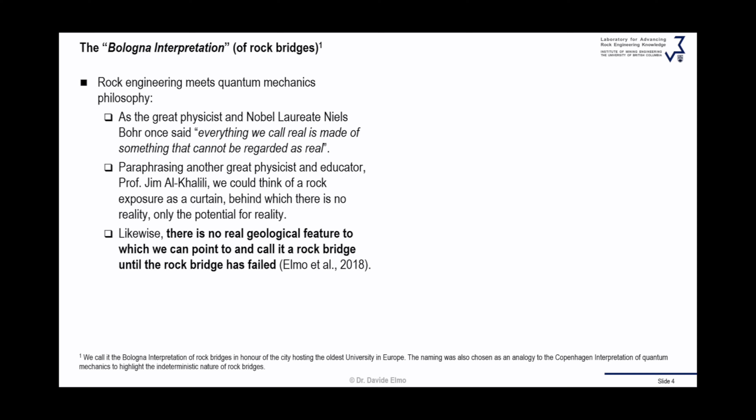This then links to where quantum mechanics philosophy and rock bridge study come together. This is the definition that I gave a few years ago in a paper: there is no real geological feature to which you can point and call a rock bridge until the rock bridge has failed. Again, you don't touch the rock bridge.

Look at this photo here. These are two photos from the Berry Head Arch in Canada, one taken in 2002, one taken in 2020. You can see now, if you look at the 2020 photo, which blocks have failed. What are the failure surfaces? But you could not determine those failure surfaces in 2002. They were hidden behind other blocks. So your rock bridges were there, but you couldn't see them.

So the definition we can give now is this: one cannot actually know where a rock bridge is until you measure it. And to measure it, you need the rock mass to fail. So you can see that we hit a paradox here. To measure the rock bridge, the rock mass needs to fail, which is something we don't want to do for design purposes. So how do you solve this big problem?

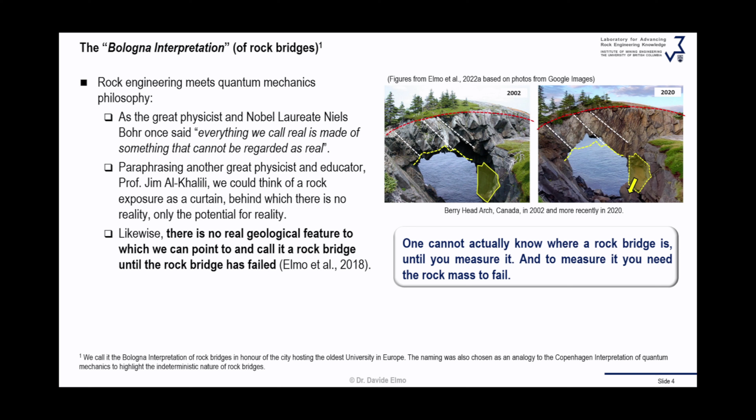We need a new paradigm for rock bridge analysis then. We need to change the way we think about rock bridges.

Prior to failure, it's not a matter of describing rock bridges as physical, deterministic entities. You cannot measure them as simply the connection between intermittent joints. There are only potential rock bridges, which exist everywhere at once.

I know it sounds difficult to accept, but if you look at this rock mass, the rock bridges are everywhere. You can't simply say the rock bridge is the connection between two of these joints. What is the loading direction? What is the strength of the joints? That also plays a part. We shouldn't see rock bridges simply as a geometrical problem.

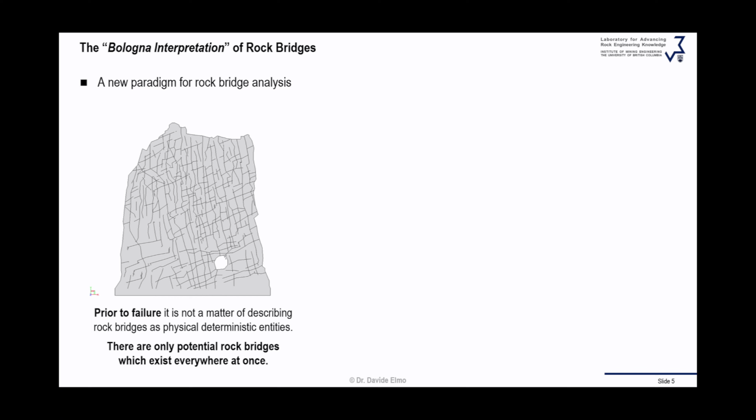If I run the simulation, I see where failure occurs—that's the rock bridges. But what you can see here is that it's a damage process, not as simple as one single crack connecting two joints. So only by looking at the rock mass as it fails can we summon the position of a rock bridge into existence, and therefore measure the rock bridge potential of the rock mass.

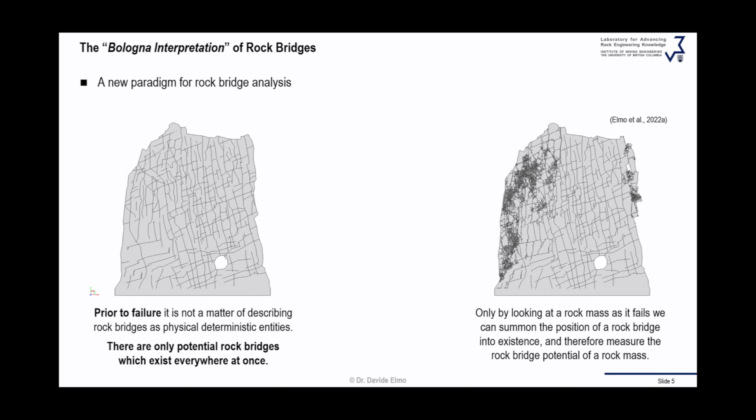It's a question of, as we'll see throughout the presentation, comparing before and after. You have to do discrete element simulations with fracturing. Continuum analysis will not give you the right solution in this case.

If you look at field evidence of this type of operation—this is work done by Shang et al. in 2017—they had a block, and managed to split it open. The block was partially formed by discontinuity. Now you can see what is the discontinuity plane and what is the rock bridge. But again, you have to break the block to see the rock bridge. You can't really measure it before the block has actually failed.

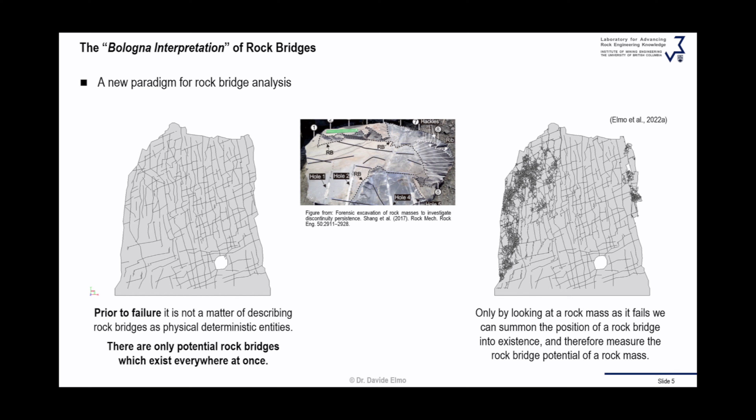And we have plenty of examples in nature. This is an overhanging slope in Israel. If you look at the picture on the left, it looks almost like a dangling tooth—this block that makes you ask yourself, how is it possible that it's still standing up? It stands up because of rock bridges.

You know they're there, but where they are, you don't know. And if you don't know where they are, how do you measure them? Because you can't see them, you can't really touch them—they're there at once, everywhere in the rock mass.

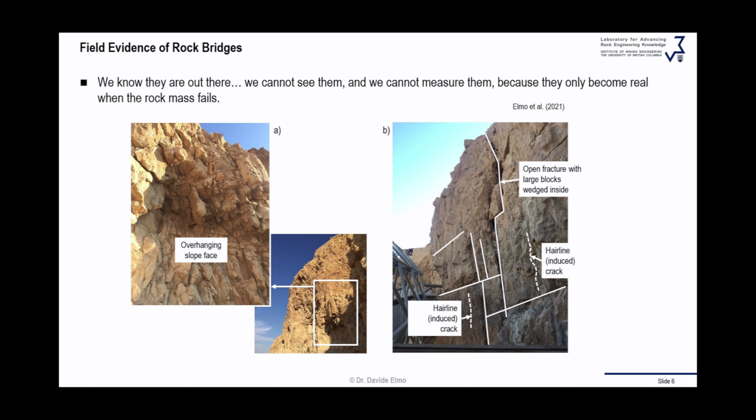This is another very good example from Italy—a tunnel in the Italian Alps. You can see from the photos on the left there was this kind of block attached to one of the side tunnels. This block had been standing for many, many years. One day we went back there to look at the tunnel, and the block was on the floor. So what happened to this block? Clearly, whatever rock bridge was there has failed.

This has a very clear implication, because we can say the block was stable before, but you cannot say what was the factor of safety of the block. It was definitely stable, then it became unstable and it failed. So you can't simply back-analyze beforehand what the rock bridge percentage was. We can see now, looking at the photo, what potentially was the portion of intact rock holding the block in place—but you can't really see it until the block has failed.

Again, you can see this paradox: you don't see them, you cannot measure them, because they only become real when the rock mass fails.

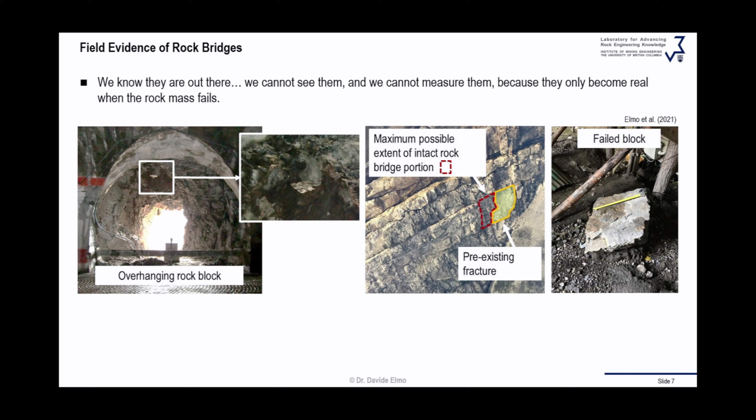So there are rock bridges. But again, rock bridges could be a portion of intact rock where the joints are not fully continuous, or it could actually be some kind of cement—something that has cemented the jointed surfaces together. That's something we don't typically take into account in our analysis. Yes, we want to be conservative, but how else do you explain this structure standing?

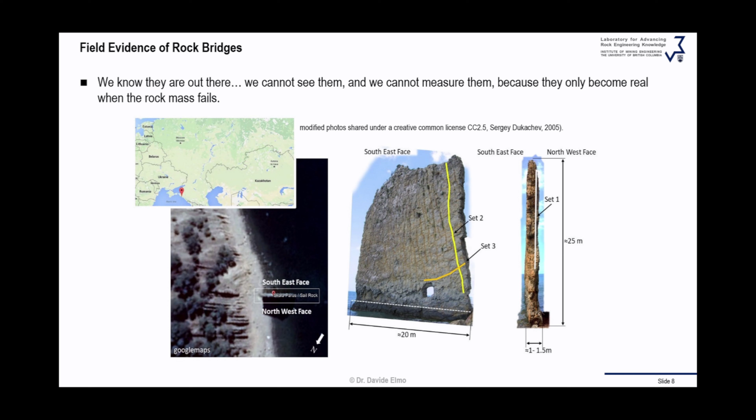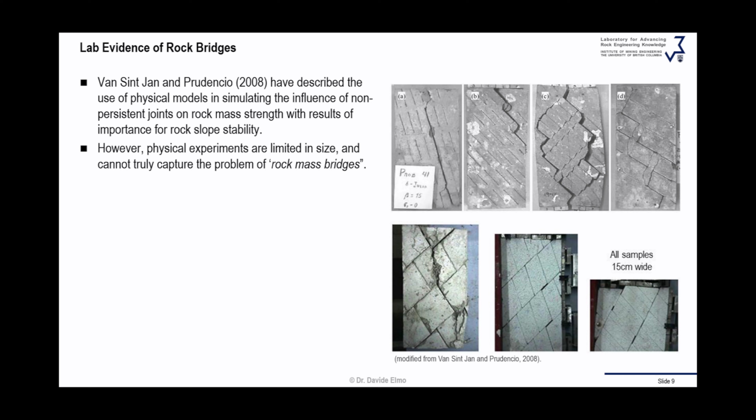Looking at the bottom row of the simulation, the one in the middle has fully continuous joints and failure occurs simply by sliding into the joints. The one next to it on the left also has fully continuous joints, but failure occurs through breakage of the intact rock. So the assumption that a rock bridge is the distance between intermittent joints is not correct. You can have rock bridge failure in a rock mass with fully connected joints. It's a question of the relationship between the connectivity of the network and the loading direction.

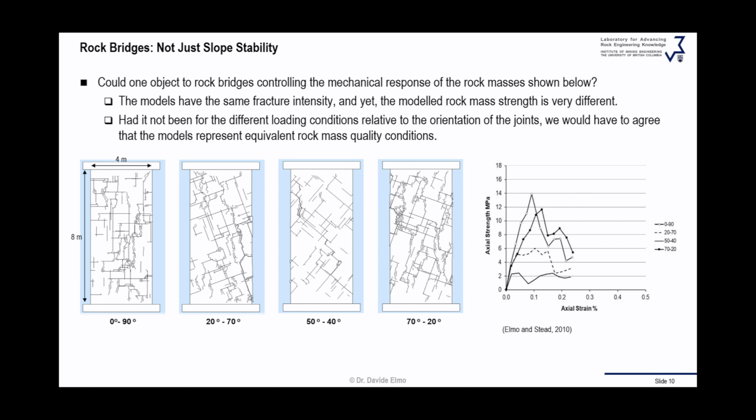So how do you define rock bridge strength when it's dependent on more than just the geometry of the fracture network? We have to adopt a system that looks at the connectivity before and after. The relationship between the two is basically what controls the failure of the rock bridges.

Now we have to deal with the difficult part, because in the literature, in the books, most analysis is done by looking at rock bridge percentage. I also used this concept for many years until I started changing direction and seeing the problem with it. The problem with rock bridge percentage is that it treats rock bridges as measurable deterministic entities. They are not - we've seen that. You don't see them, you don't touch them.

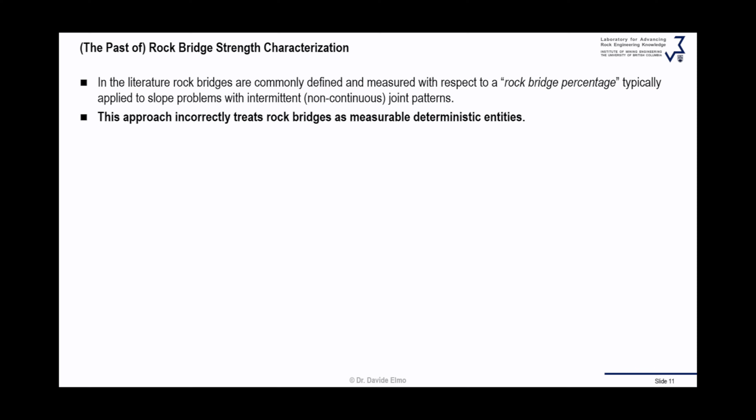This goes back to the definition of rock bridge. Go back to Karl Terzaghi, the father of soil mechanics. In 1962 he published a paper with the first evidence of this concept of rock bridges. Terzaghi called them 'gap,' not rock bridges. This gave rise to the idea of a percentage of rock bridge as the ratio between the total area of fractures and the portion of that surface which is actually intact rock.

But Terzaghi made a very good comment already in 1962. He said the relationship expressed by this equation, which defines the continuity of the fracture, is merely of theoretical interest because it's impracticable to determine the value of Ag. So Terzaghi was saying you cannot measure rock bridges. You can't use percentage measurement - yes you can define them using this equation, but it's merely a theoretical exercise because the issue is where they are and where you see them, in relation to the surface of a fracture. I call these in-plane rock bridges.

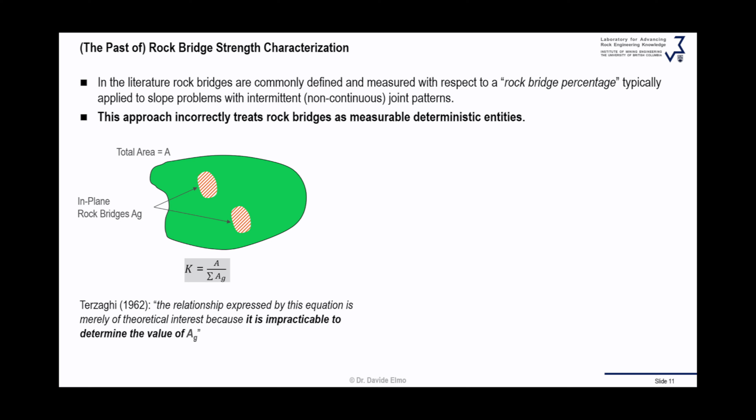A few years later, Jennings developed a different concept of rock bridges, looking at intermittent joints in the case of slopes. Now we went from a three-dimensional to a two-dimensional aspect. You have a block that could be defined if the portions of intact rock between the joints fail. This gives rise to the concept of continuity given by this equation, K - the ratio between the portion of the joints and the sum of the joints plus the portion of intact rock between the joints. Jennings developed equations to account for this.

He said you could substitute the joints and intact rock with a material with equivalent properties. Here we can go off on a tangent - are we dealing with a material with equivalent properties, or an equivalent discontinuity? Because Jennings actually called it equivalent discontinuity. It's different, simulating the problem as a material with cohesion and friction, versus cohesion and friction of an equivalent joint.

More importantly, the books always reference these two equations for equivalent cohesion and equivalent friction angle in relation to the continuity. One minus continuity is your rock bridge, and becomes a rock bridge percentage. But if you look at the original 1970 paper, it's actually a different equation. So we have to be careful which equation we use and how. Because if I use the one usually reported in every book, even the guidelines for large open pit design, you actually give more friction resistance to the problem - it's actually less conservative compared to what Jennings was saying in 1970.

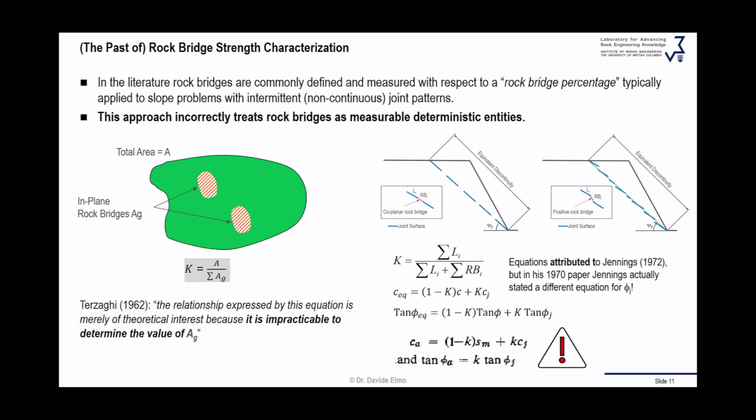But there's more limitation than that, and we're going to see now a problem. First of all, the concept of intermittent joints for coplanar joints. Joints are not always like that. Networks are more complicated than that.

It assumes that the rock bridge strength is spatially independent, meaning it doesn't matter where the rock bridge is placed, you're going to get exactly the same behavior as long as you have the same percentage. Put the rock bridge at the toe, put the rock bridge on the crest, it doesn't matter according to Jennings' equations. It's scale independent. We're going to see now a problem.

If I have a rock bridge percentage of 5%, it doesn't matter if it's given by 5 small rock bridges or one big rock bridge. This is not correct because intact rock strength is scale dependent. And more importantly, it assumes the rock bridges are measurable, as if rock bridge is just a geometrical entity.

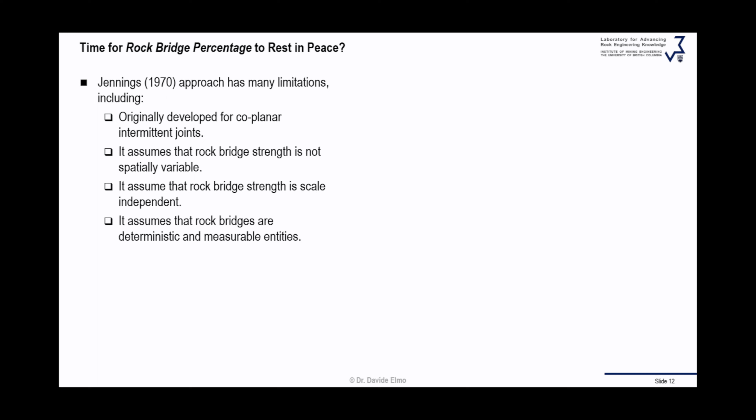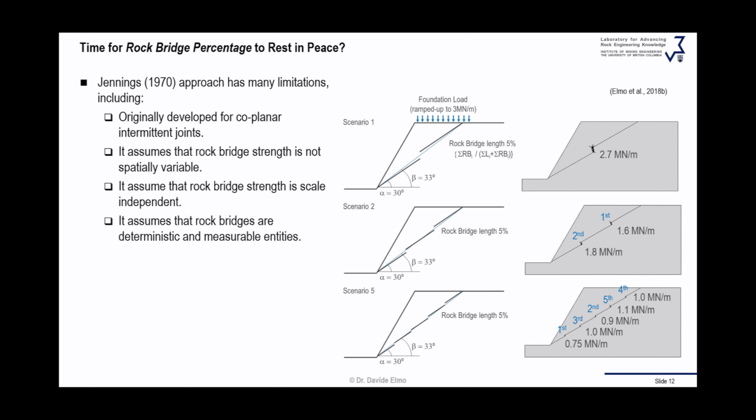If I have 5, the force I have to apply is much smaller, barely 1 meganewton per meter. So now you can see that it's the same problem from a percentage point of view, but the load that can actually be taken by the slope is very different. So this tells you that you cannot rely on rock bridge percentage.

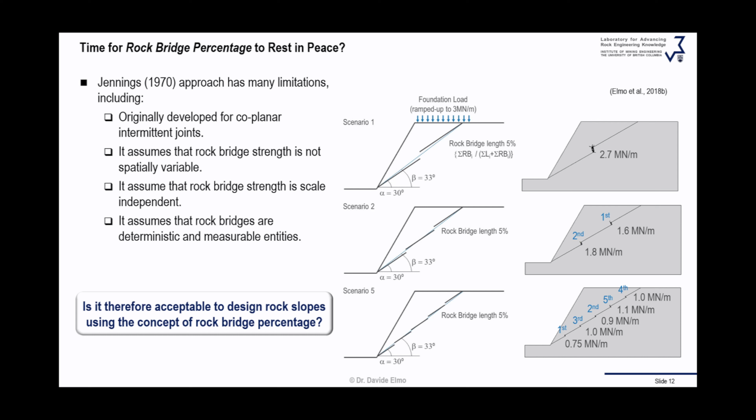And here is the difficult question for everyone now: is it therefore acceptable to design rock slopes using the concept of rock bridge percentage? If you ask me, I would say no. Others may say yes. But remember, there are some fundamental problems with Jennings' equations, and we need to accept that. So we're proposing something different, and we're going to see it's not something easier. But seeing the clear message doesn't mean that because it's difficult we shouldn't use it.

Our approach is different. We take a step back and look at the problem more holistically. What are the parameters that really control damage? We're not talking about rock bridge percentage anymore—we talk about damage and potential for failure. You're going to have the intact rock strength, the loading condition (direction and magnitude), the rock mass connectivity—we'll see the definition of it—and rock mass interlocking, which are very different.

You can have a fully connected rock mass, but the blocks don't move depending on the loading direction. If the blocks don't move, the stress will have to go through the intact rock, and that's what can actually break. So we need to look at how the rock mass potential is transformed from a potentially kinematically controlled problem to maybe a stress-controlled problem. So we try to look at the mechanism, not just the strength itself.

But to determine the rock mass potential, or rock bridge potential as we call it, you need to look at these parameters, and they're not easy to measure. Some of them, like connectivity and interlocking, basically fall under the field of probability. You don't have one connectivity, you have a potential connectivity, because, as I say, you don't know what's behind the rock face.

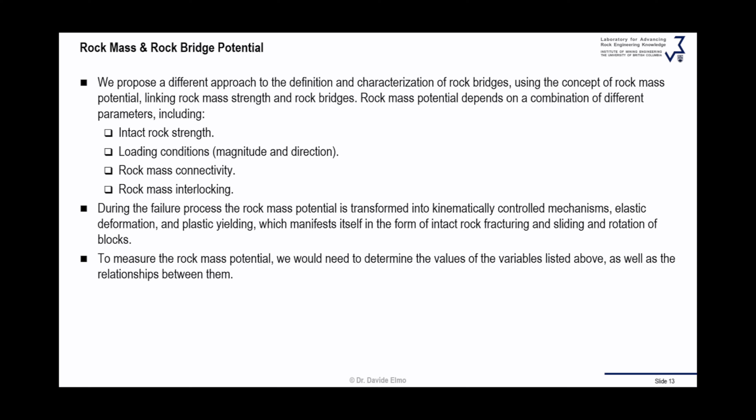These are the definitions. You can read more about this in the paper that I reference at the end of the presentation. I'm going to show you the references. But you have a two-dimensional connectivity index, NCI 2D, or a three-dimensional connectivity index, NCI 3D.

And you can see the formulation for NCI 2D includes parameters you can actually map in the field. The P21 is the total fracture length divided by area. P20 is the total number of fractures divided by area. I20 is the number of intersections by area. But you can see that the number of intersections has to be scaled to account for the shape effects.

What is the window that you're mapping? Is it an equidimensional window or is it not equidimensional? This idea comes from the empirical behavior of pillars. A slender pillar or a wider pillar with a different ratio behave differently, so we need to account for that.

And you can technically map P21, P20, and I20 in the field if you have an image with photogrammetry. In 3D it's more complicated because now you're dealing with P32, total fracture area by volume, and P30, number of fractures by volume. The I31 is the actual linear intersection between fractures, and I30 is the number of intersections. All these parameters can only be generated using discrete fracture network models.

But because you're talking about discrete fracture network models, now you're dealing with probability. You have multiple realizations, so don't expect one single parameter.

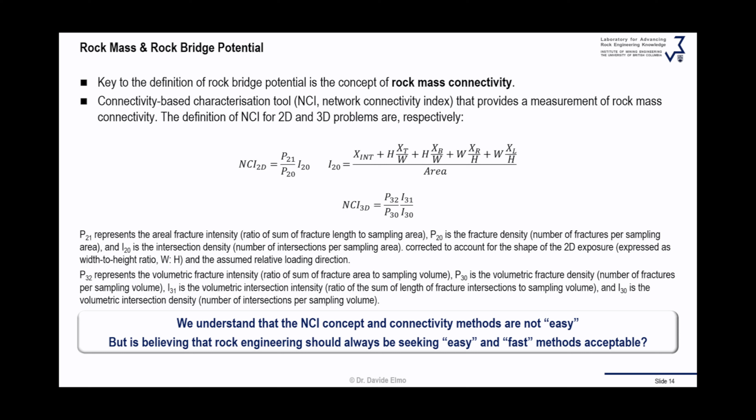So it's not an easy concept, I understand that. But why do we keep believing that rock engineering should always be seeking easy and fast methods? We can't basically fool ourselves by saying everything has to be fast, everything has to be easy. But by doing so, you use empirical methods, and not necessarily are those empirical methods actually correct.

Thinking in terms of quantum mechanics, again, quantum mechanics is not easy. But that's what was actually needed to have computers, semiconductors, and so on. So we shouldn't imagine if someone 100 years ago said it's too difficult, we're not going to pursue it, we're going to do something easy. We would not have what we have today.

Here's an application of NCI. This is the two-dimensional version of NCI, coupled with a different geological strength index table that you may be familiar with. So we integrated NCI with GSI. A couple of things to say.

This boundary between blocky and massive should not be interpreted as a clear-cut boundary. An NCI of 4 may be the boundary between massive and blocky, might actually even be 5. So we have to be flexible with this boundary. We are kind of too strict when we build these tables.

This table is different from the original GSI table because we try to really follow geological trends. So you can see the numbers in the cells that represent the GSI. They're not the same numbers you may be familiar with, because we try to avoid this kind of reversibility problem of GSI itself. You can read more in the paper how this table was created.

But what you can see here with NCI is that if I have a rock mass defined as a GSI of 65 plus or minus 5, and I look at the behavior of pillars in this case, the pillars behave differently. A slender pillar with a ratio of 1, or with a ratio of 2, the NCI of those pillars is different, hence the different strength. So the rock mass potential is different for those pillars.

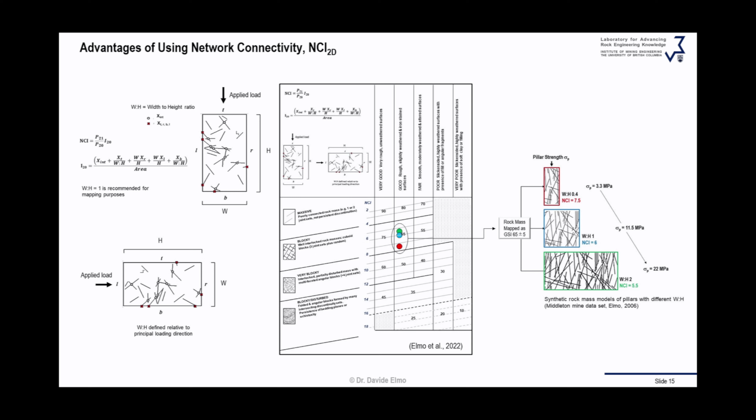And this is really where we now look at rock bridge potential. To do so, we have to look at the NCI after failure, this NCI RB, and the NCI before failure. What is the relationship between the two?

Again, we are not here to look at the actual rock bridge potential. The importance is not looking at how much rock bridge potential I really have, and definitely we don't transform that as a percentage. It's more to understand that if I have a very high NCI RB, it means that I am really destroying intact rock.

So I have a stress-driven problem. I need to break through mostly intact rock. It's not about sliding on the joints. If my NCI RB is actually small, that means that the failure is controlled by structural control problems.

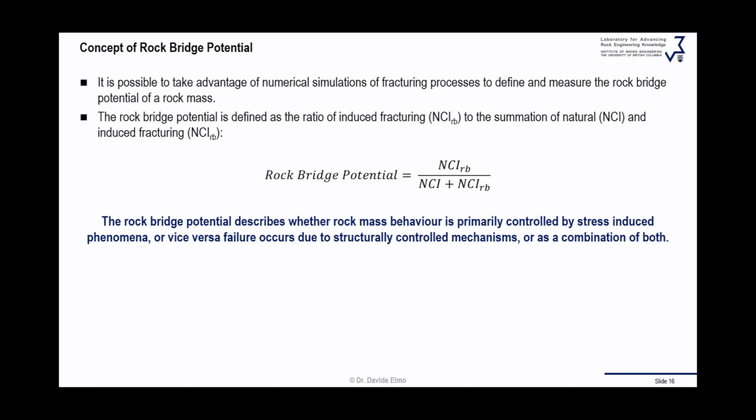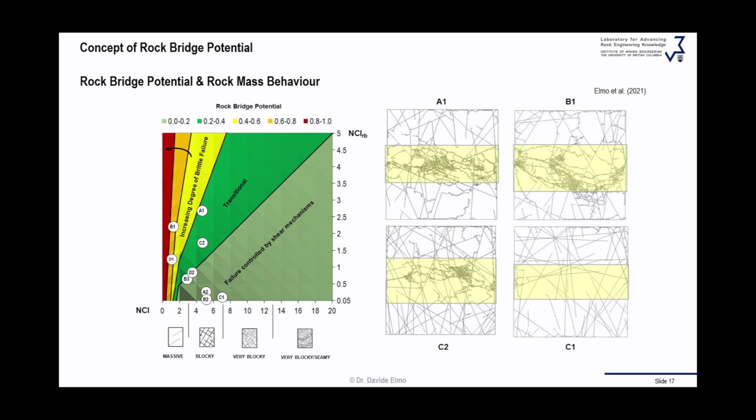These models were created for a particular slope for a mine. The difference is the orientation of the joints and how they get together when you try to simulate the failure in shear. These are synthetic shear models. Some models give you more damage, others less damage. C1 almost doesn't have any damage whatsoever.

So when you group them together, you can switch, and you can see this kind of behavior of the rock bridge that links to the rock mass behavior defined by Kaiser in 2018, this kind of matrix of rock mass behavior.

Don't interpret these white lines as fixed. Each problem may be different, so you may have some small variation in how those lines are placed. They've been placed here just to represent globally the difference between a stress-driven problem and a structurally controlled problem, and the relationship between the NCI before and after failure.

So if I have a simulation that tells me I have, let's say, an NCI of 10, and my NCI-RB is barely 0.5, then I'm going to be in this M31 category, which is basically structurally controlled. But if I have a very low NCI and I just generate stress-driven fractures, I'm going to be in M12 or M13, which is a stress-driven failure.

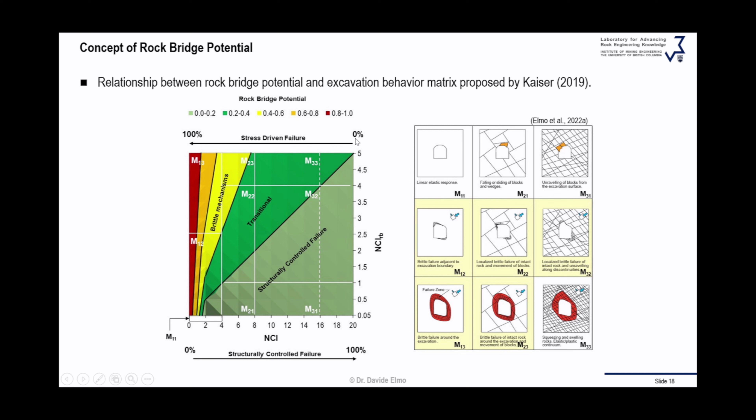So you can look at where you are. If you're between the red, the yellow, and this darker green, that's the transition — you still have a percentage of stress-driven. Once you're in this structural control failure, your stress-driven failure is zero. Everything basically happens because of the discontinuities.

And if I look back at the model we showed you before, let's assume some intact rock properties, some joint properties. We don't know what they are because we cannot really travel to that location. But even if you could travel there, what is the property of those joints at the scale of the monolith? You can't tell that. Intact rock will be variable as well. So let's do a simulation with some assumed properties and see what happens.

We don't say this is reality, but we can say we have an NCI before failure and an NCI after failure. This red line represents where the fracture is happening. Initially the NCI was about 4, and my NCI after failure is 1. So my rock bridge potential is somewhere here, about 0.2 rock bridge potential.

So what this tells you is that even if it's a very blocky rock mass, blocky to very blocky, failure will occur through intact rock failure and stress control failure. Don't assume that because you see many fractures, everything is going to be purely structurally controlled. You need to break the intact rock here to make it fail.

And here we're talking about a monolith barely 25 meters high, so you know what it means — the stress is just pure gravitational stress. So what really makes this structure fail is maybe whether it flips to the side rather than failing purely gravitationally.

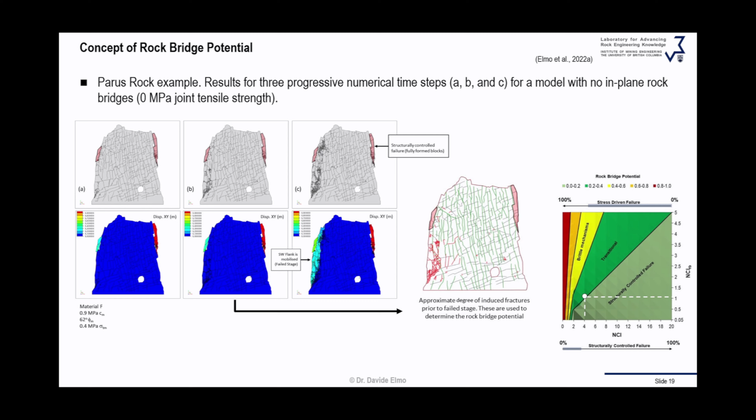So in conclusion, there is no doubt that rock bridges exist, but we cannot describe rock bridges as physical objects. Their existence and definition are conditioned to the specific rock engineering problem and failure mechanisms being considered. Rock bridges become real only when we look at them, which means after they fail. So you need to simulate failure.

Continuum models won't really help you in that way, because they can't really simulate — maybe they simulate yielding — but you need to look at the combination between stress-driven and structurally controlled failure. The blocks need to be free to move in your models.

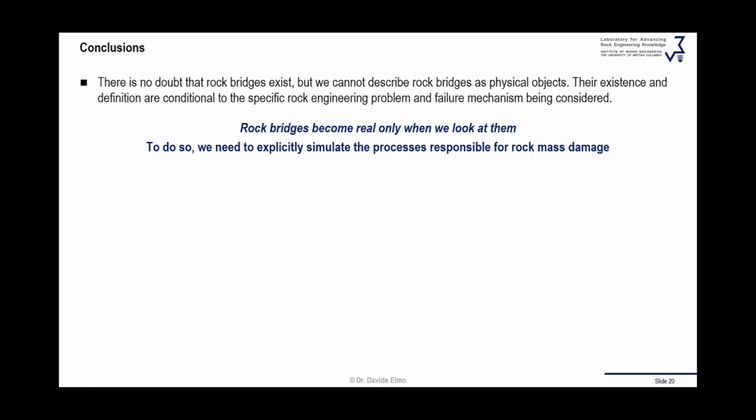So my opinion, and this is my opinion, is that rock bridge percentage is no longer acceptable to simulate rock bridge analysis, rock bridge strength. It doesn't account for failure mechanisms, it doesn't account for scale effects, and it doesn't account for the actual spatial variability in terms of location of the rock bridges.

So there are too many limitations, and even just relying simply on fracture intensity, whether P21 or P32, is not acceptable. P21 and P32 are not measurable — they're not measures of rock mass quality. They have the same kind of limitation as GSI in that context.